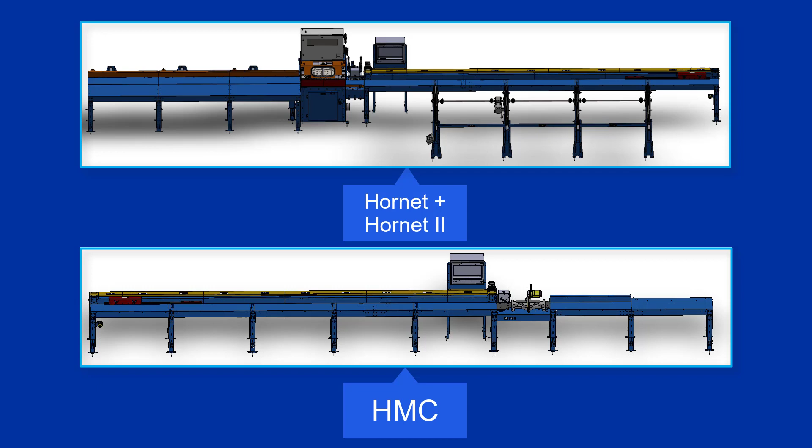An idler assembly is located on the end of the infeed pusher. Servicing the idler assembly may be necessary to fix multiple issues, such as slippage on printing, or if the encoder is faulty.

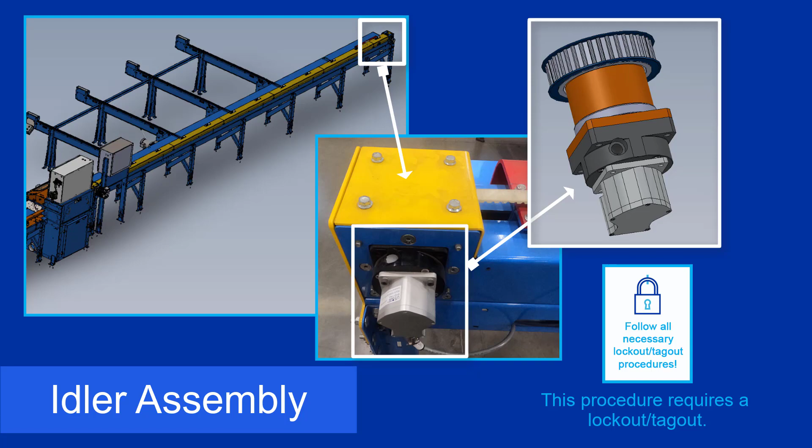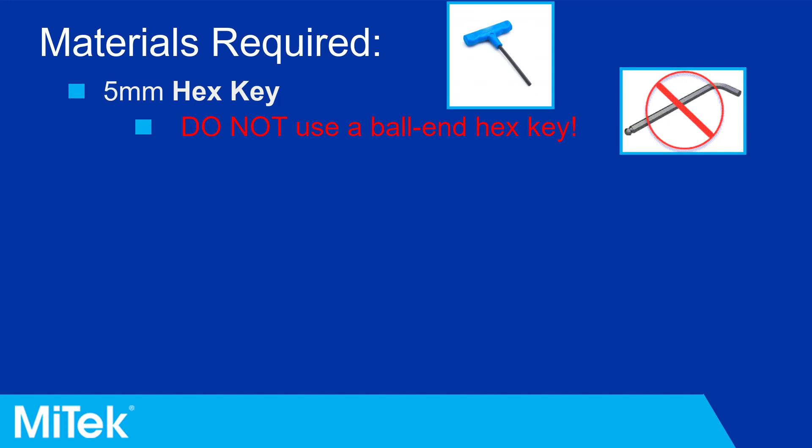Use the following procedure to replace the encoder and bushing for the idler assembly if directed by MiTek automation support. Gather the following materials: a 5mm hex key (do not use one with a ball end, as it may break off), Loctite with a green formula, the replacement part or parts (a bushing, encoder, or complete idler assembly), and a cleaning cloth.

This procedure requires a lockout/tagout before proceeding. The following instruction assumes the idler assembly is attached to the saw. We will review how to install the bushing and encoder to a new idler assembly later.

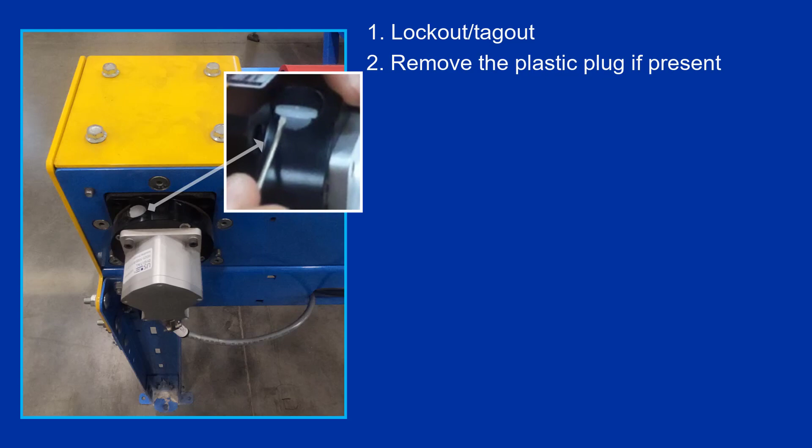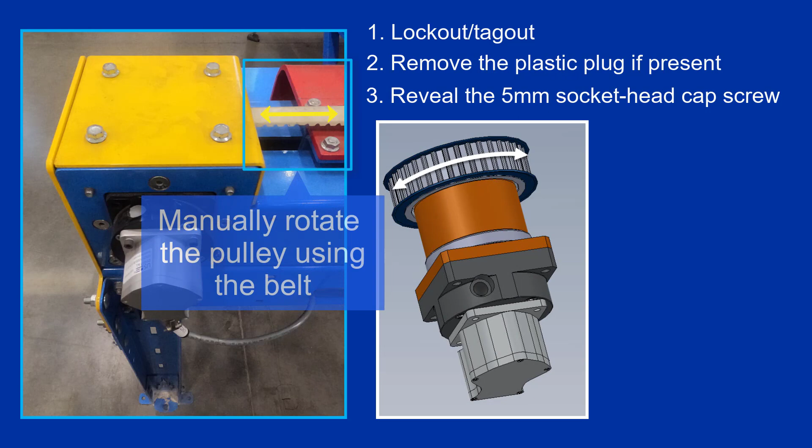To remove the encoder from the idler assembly, remove the plastic plug at the top of the assembly if present. Inside should be a 5mm socket head cap screw. If the screw is not present, manually rotate the pulley via the infeed pusher belt until the screw is visible. This screw acts as a lock collar for the encoder.

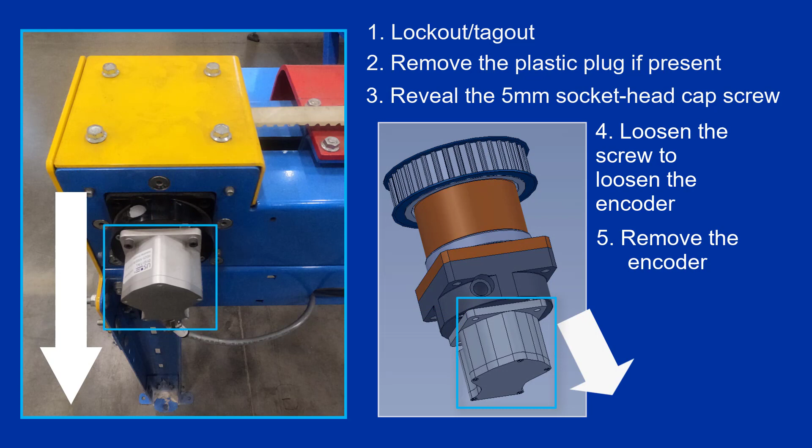Using the 5mm hex key, loosen the screw by turning it to the left. Be sure to support the encoder as the screw is loosened to keep it from falling. Once loose enough, remove the encoder from the idler assembly.

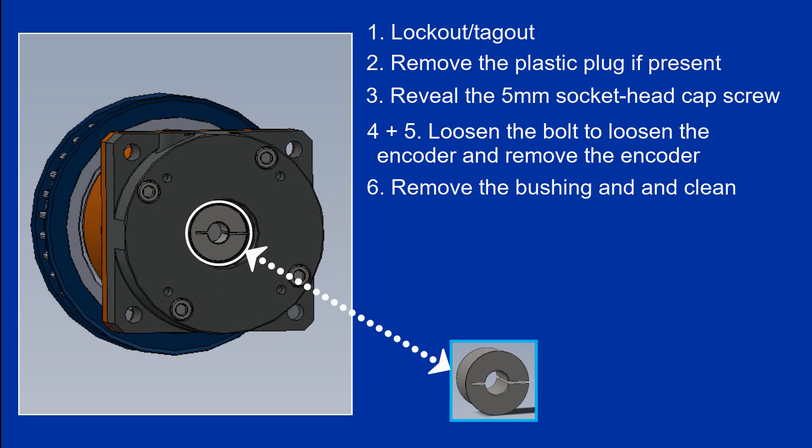Removing the encoder will reveal the bushing inside the assembly. Remove the bushing from inside the assembly. Clean the outside of the bushing and the housing with a clean cloth. Apply Loctite to only the outside of the bushing, then reinstall it. Push the bushing until it is completely installed and can't be pushed in any further.

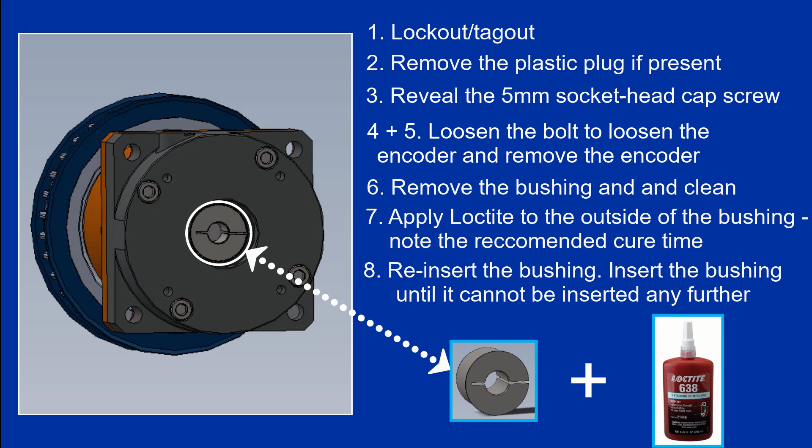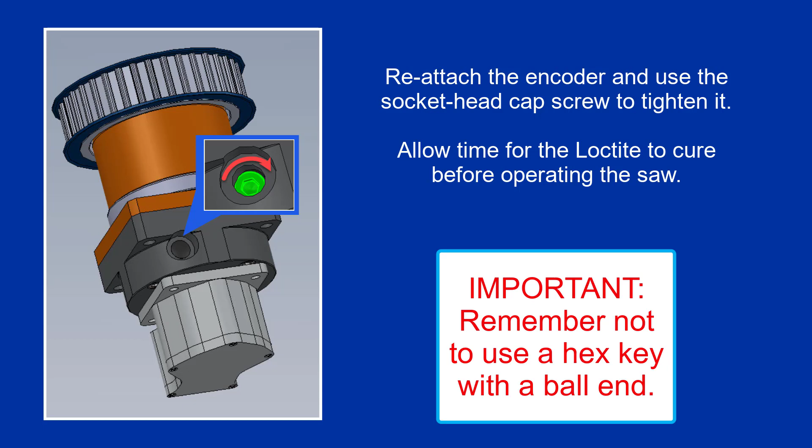Reattach the encoder to the assembly and use the 5mm socket head cap screw to tighten it by turning it to the right. Allow time for the Loctite to cure per the manufacturer's instructions before operating the saw.

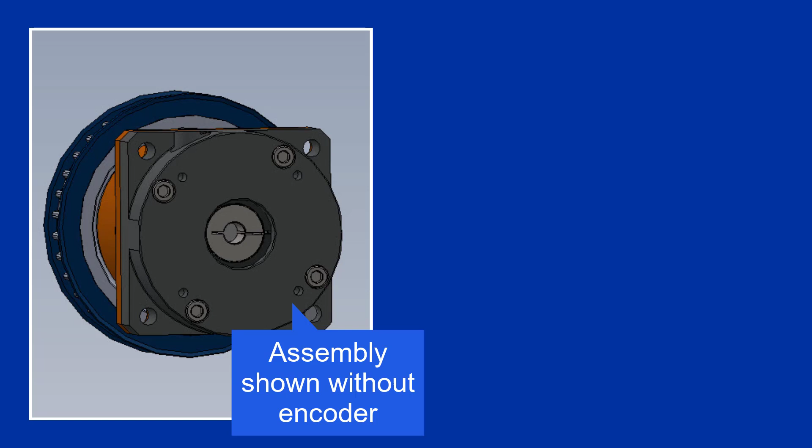If replacing the whole idler assembly, the encoder will come separate from the assembly. Remove the bushing and clean the outside of it with a clean cloth. Apply Loctite to the outside of it. Reinstall the bushing. When reinstalling, push the bushing until it is completely installed and can't be pushed in any further.

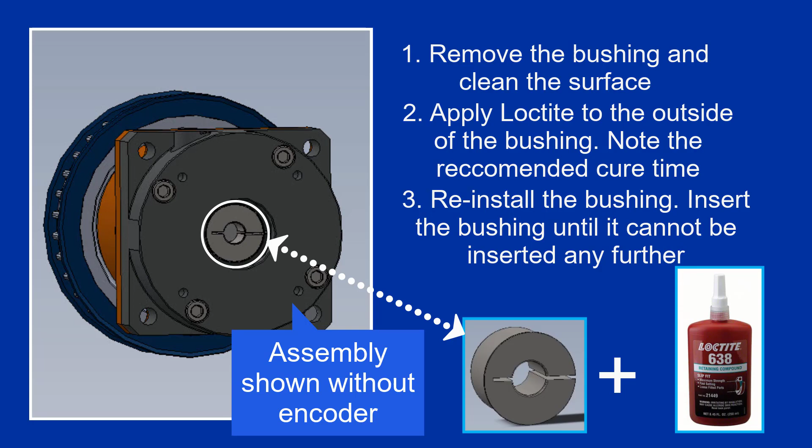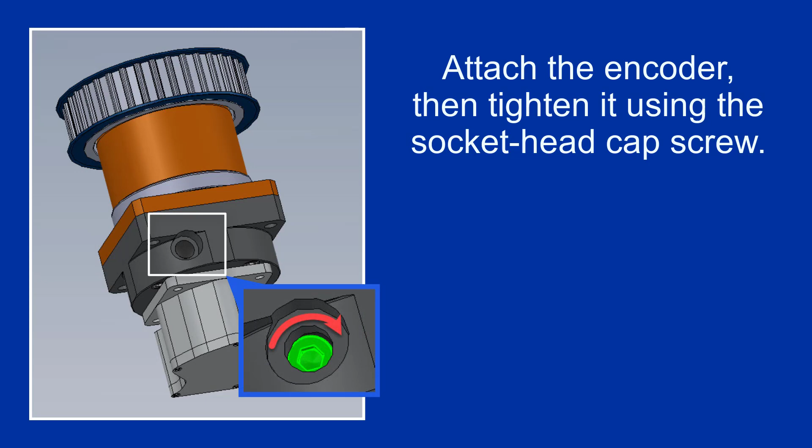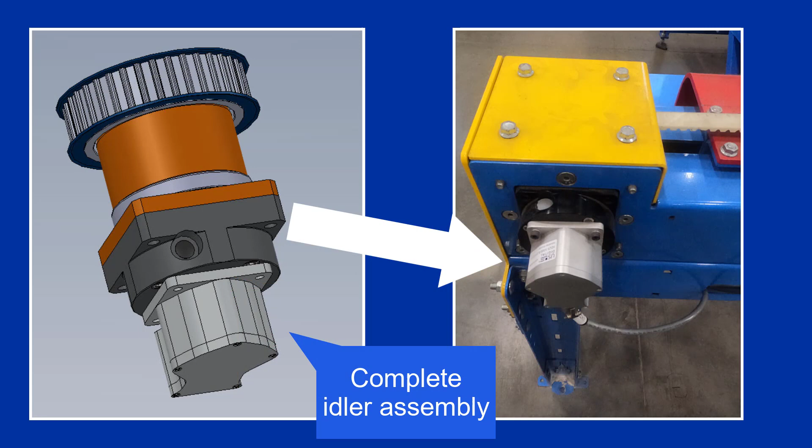Attach the encoder, then tighten it to the assembly by tightening the 5mm socket head cap screw. If the screw is not present, rotate the pulley in a clockwise direction until the screw is visible. The idler assembly can then be installed on the saw once all parts are attached. Allow time for the Loctite to cure per the manufacturer's instructions before operating the saw.

Check the pusher calibration after performing maintenance on the idler assembly or encoder. If you have any questions or need further assistance, please contact MiTek Automation Support.